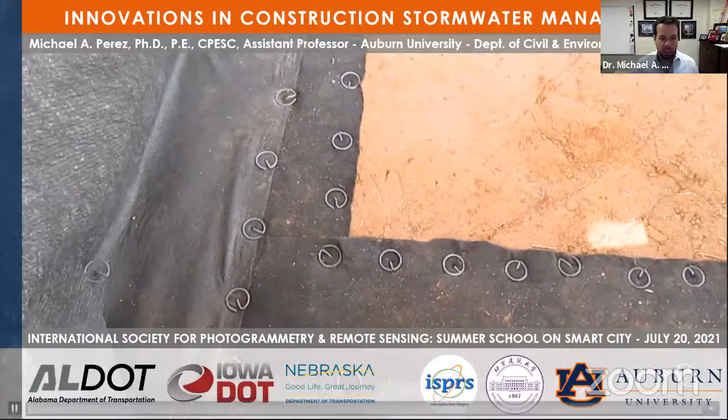So I wanted to start by introducing myself and giving you a little bit of background. My name is Mike Perez. I'm currently an assistant professor at Auburn University. But prior to joining Auburn, I had a little bit of a different route. I got my bachelor's degree in civil engineering from Florida State University in 2012. Then I came to Auburn and got my master's and PhD. I worked for a short period of time in Atlanta, Georgia, for a company called AECOM, where I did stormwater engineering work. Then I became an assistant professor with Iowa State University in 2017. In 2019, I had the opportunity to come back to Auburn, this time as an assistant professor.

To kind of give you a little bit of idea of where we are, I'm originally from Miami, Florida, down here in the southern part of Florida. Tallahassee is here, where I did my bachelor's. Auburn is here, and then Atlanta. Then I went to Iowa State, and now I'm back at Auburn.

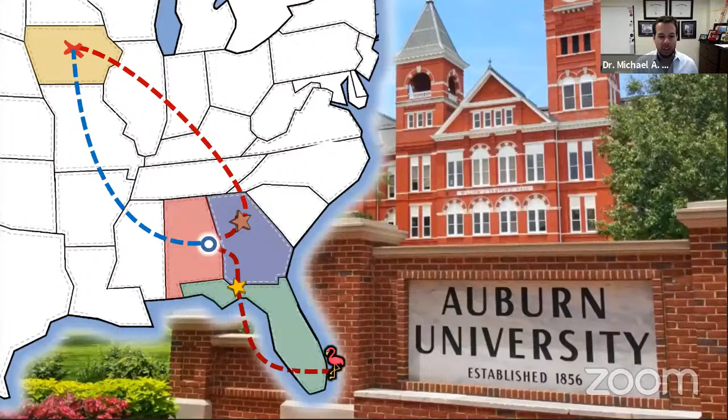While I was at Auburn as a graduate student, I had the opportunity to visit China and to visit the Beijing University of Civil Engineering and Architecture and teach while I was there. So I spent a summer in Beijing, and I got to work with a lot of great people and a lot of great students as part of the Auburn and BUCEA exchange program that we had at that time.

So today I'm going to be talking about construction stormwater management. Here in the United States, construction stormwater—that's the water that comes off of construction sites during rainfall events—is one of the largest non-point sources of sediment. This causes a lot of problems. If you see the picture there on the left, you can see that water is very dirty. It has a lot of sediment, a lot of dirt mixed in with that runoff.

That causes issues downstream when that water gets into a receiving water body—it could be a stream, a river, or a lake that gets polluted. So there's a need to improve the performance of practices that are used on construction sites to help minimize the amount of soil loss that's leaving the site.

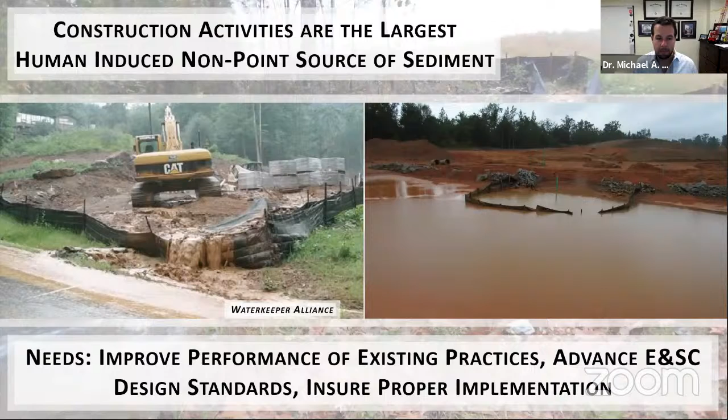Here in the United States, every year we have a report card on America's infrastructure, and stormwater received a letter grade of a D. That's a very bad sign, a very bad grade to receive. What it tells us is that there's a need to improve the way we manage stormwater in the United States.

To give you an idea of how big the problem is, it's estimated that every year there's 80 million tons of construction-generated sediment that's being washed into waters of the US. 80 million tons is a huge number—it's enough to fill up 5 million dump trucks. These dump trucks, if you parked them back to back, bumper to bumper, would create a 9-lane road from Los Angeles to New York. So a lot of sediment is leaving our construction sites and washing into the rivers.

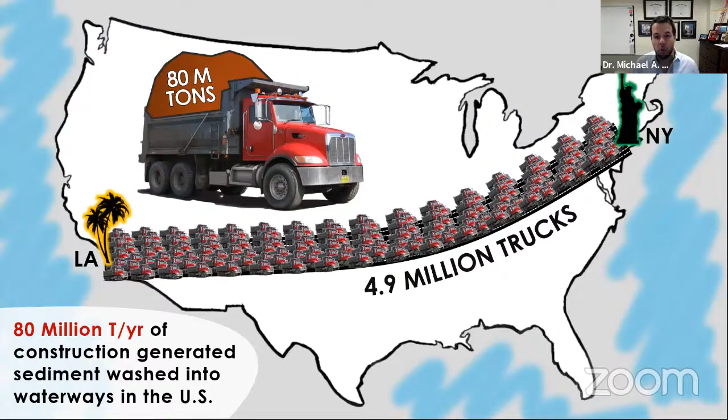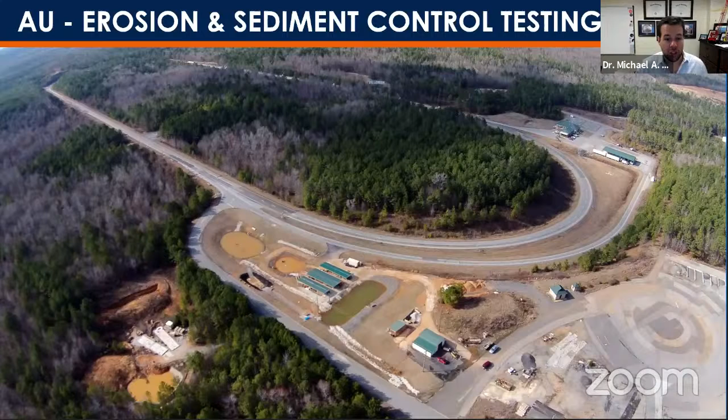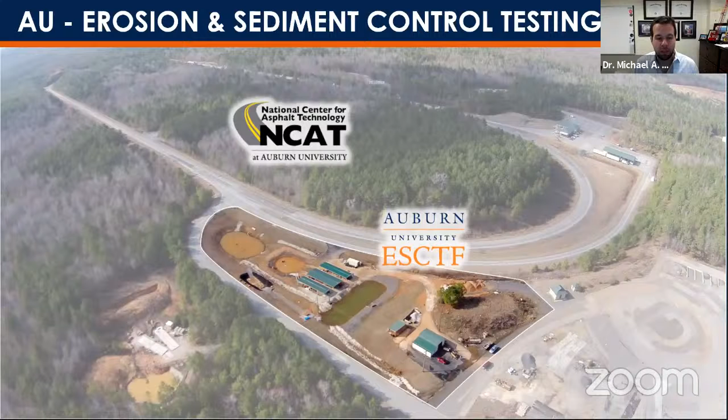What we do here at Auburn is that we've got an outdoor testing facility that's dedicated to improving the practices that are used on construction sites. We're co-located at the National Center for Asphalt Technology—this is a 1.5 mile test track that's used to test pavements. We have our facility down here at the southeast corner of the NCAT facility, and we're called the Erosion and Sediment Control Testing Facility.

This video here just shows you a little bit about the track, and you can see our facility there in the back corner.

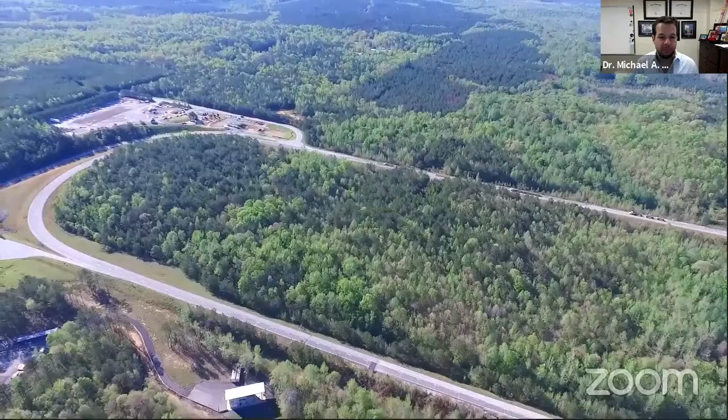The test track is actually used to test different pavements. They pave the track with pavements from all over the country, then run super weighted tractor trailers around it to test the durability of the pavement. They map out cracking and all the failures that might occur on the track.

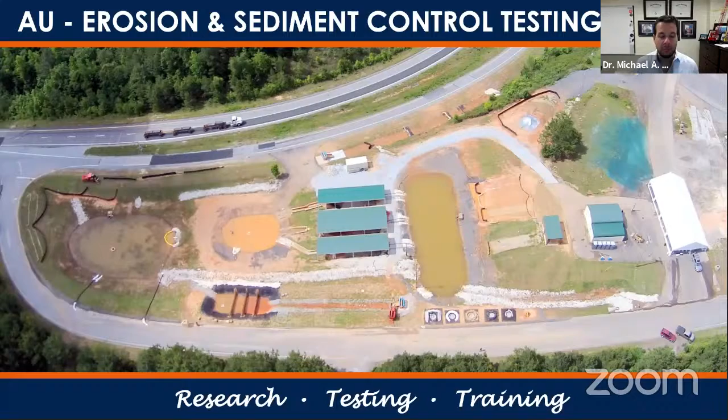Our test facility is about 2 acres in size. This was our current facility before we made some additional improvements and additions. We've got a variety of test apparatuses. We can test sediment barriers, skimmers used in stormwater detention ponds, a sediment basin for research, 3 channels to test practices used on roadside channels, and a rainfall simulator.

On top of all these research apparatuses, we also do a lot of training. We've got a variety of training stations throughout the facility where we can demonstrate the proper installation and placement of many of these practices used on construction sites.

Last year we actually expanded our facility. If you look at the top of the picture, you can see our old facility, and we now have all this new area we just started developing. We've added about 8 acres, so now we're about 10 acres in size. This gives us a lot more capabilities, more water we can use for testing, and more space to conduct experiments.

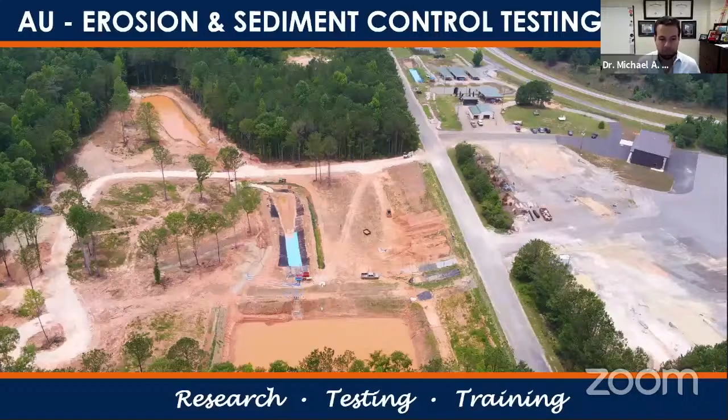When we do testing, we try to mimic or replicate the conditions you'd see on a construction site, but in a controlled environment. We pump water in from our storage ponds at a controlled rate to mimic construction site runoff, and we introduce sediment into the water stream so that we get a sediment-laden, turbid discharge into our test apparatuses.

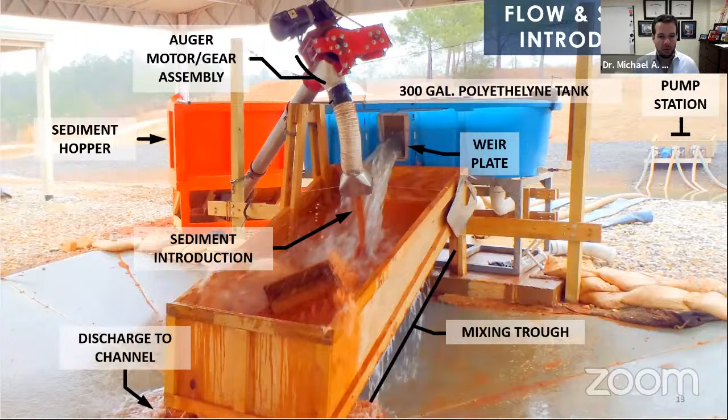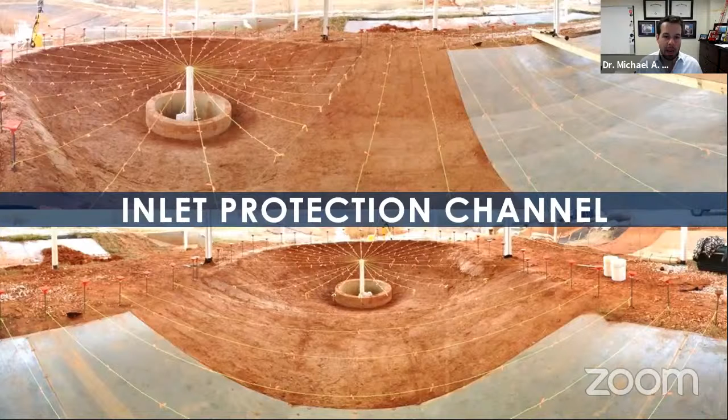In the back, you can see what's called a total station - a robotic total station, that yellow piece over there. We've got all these lines with flags on them, and those flags are survey points. Before an experiment, we survey the entire channel, then introduce the flow and sediment, trying to measure the erosion and the sediment captured around a practice. After the test we survey again, then subtract those two surfaces using GIS to determine how much sediment we captured, or how well that practice performed.

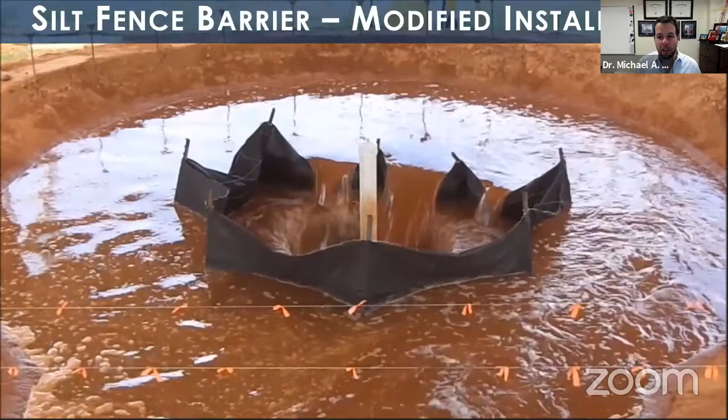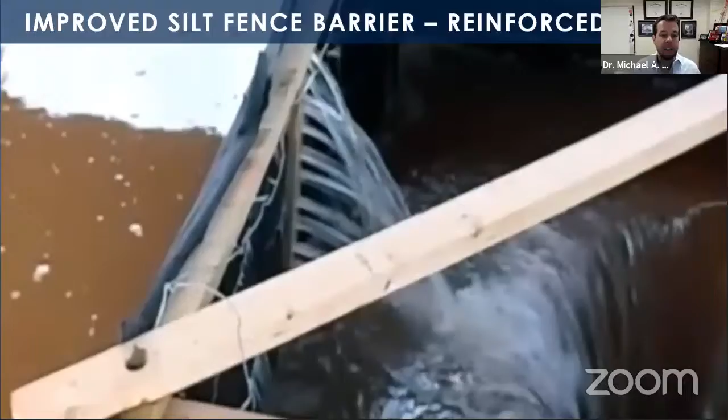So this is the same type of material, that silt fence material, but we put in what is called 2x4s. This is lumber that's commonly available and can be used to strengthen the installation so that it's no longer overwhelmed by the pressures of the impounded water. We also had to develop a dewatering mechanism so that water could exit through the barrier efficiently, since the barrier becomes clogged and water can no longer pass through it. So we add that dewatering mechanism in the back.

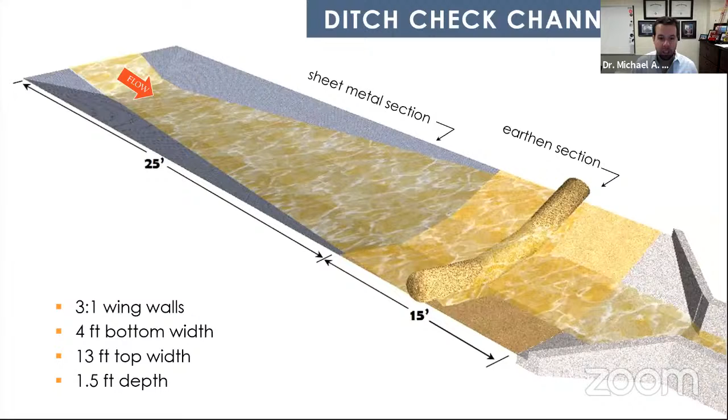Another project we worked on at our test facility was looking at ditch check apparatus, or ditch check practices. Ditch checks are used in a roadside channel to slow water down, reduce erosion on the channel, and let sediment fall out because you've slowed down the velocity of the water. This gives you an idea of our setup: we've got a 25-foot long metal section, then a 15-foot long, or about 5-meter long, earthen section where we can install various ditch checks.

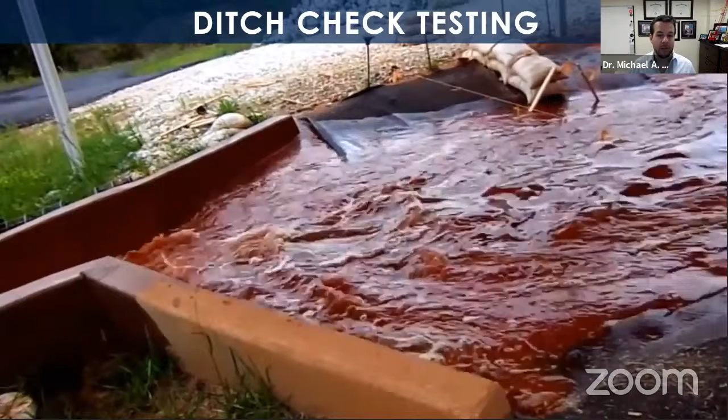Here's a video of a practice that failed, that didn't do very well. You can see the wooden stakes that hold the wattle in place broke because there was too much water upstream. So what we do is play around with the installation and look at different materials to try to make that practice work better.

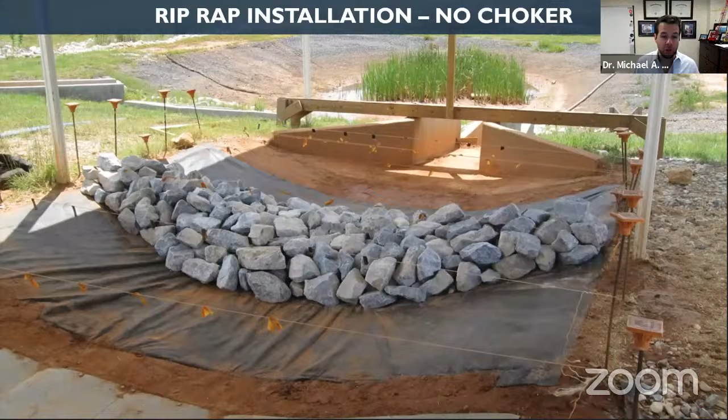Here's another type of practice. This one uses what's called riprap, or stone, to create a ditch check. That rock is oriented to create basically a dam. When we run water through it, this is 1.7 cubic feet per second, you can see it impounds about 14.5 feet. This impoundment is very desirable because this is what slows down the water and protects that channel from eroding any further.

So what we try to do is improve the impoundment capabilities of these ditch checks by modifying the installation. As an example, here we added what's called a choker stone, smaller rock in front of the ditch check, to try to make the practice less porous, to choke the larger rock and prevent water from flowing through it so fast. With that rock added at the same flow rate, we get 20.5 feet of impoundment instead of 14.5, so we're able to extend that impoundment pool further back and protect more of the channel.

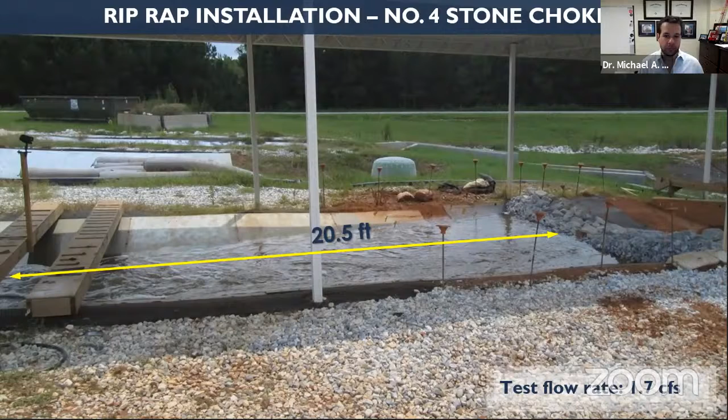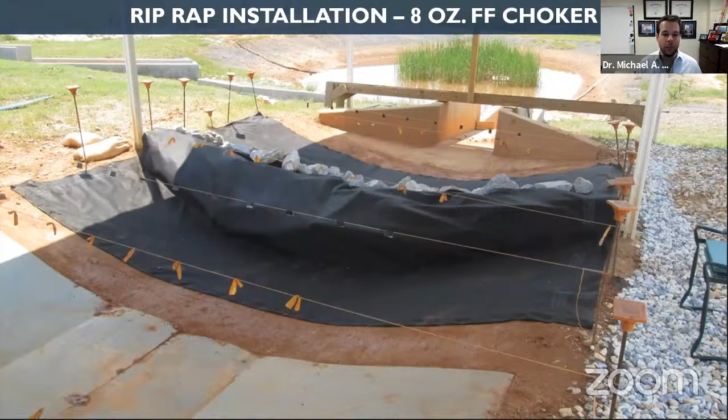We also tried a different installation where, instead of the small rock, we used this filter fabric, a geotextile wrapped around the rock. The idea with a geotextile is that water can no longer pass through the fabric, so now it has to pass through the top of the ditch check. When we do this, we get an impoundment of about 29 feet. So we're able to take our original impoundment of 14.5 and double it by adding that geotextile. Again, this is very desirable because you're protecting a longer piece of that channel.

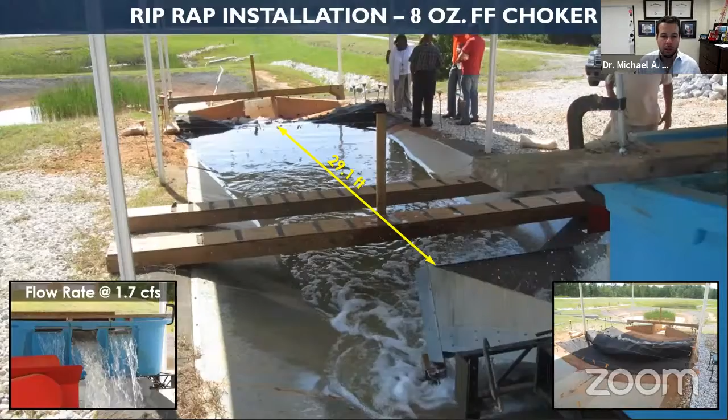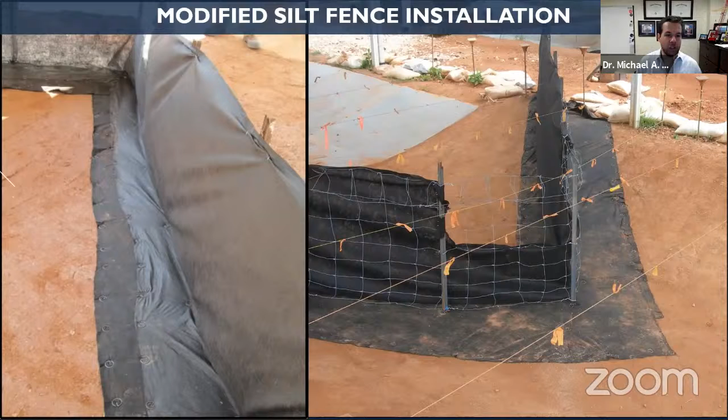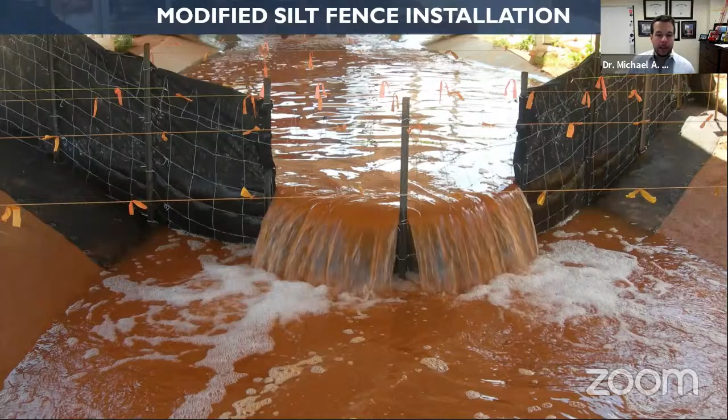We also looked at different materials that can be used for ditch checks. This is what's called a silt fence, installed in this V pattern that you see here. Typically this installation gets trenched into the ground, but we tried a method where you would pin it, or staple it, to the ground instead of trenching it, making it easier and less work to install. We also added a weir notched into the ditch check, which tells the water where to overtop it. So you can use less material, you have a dedicated spillway, and water doesn't go around the edges of the ditch check, which is undesirable.

This was in a longevity test. You can see all the sediment that gets captured in that channel. We also surveyed this channel, and after this test there was 42 cubic feet of sediment.

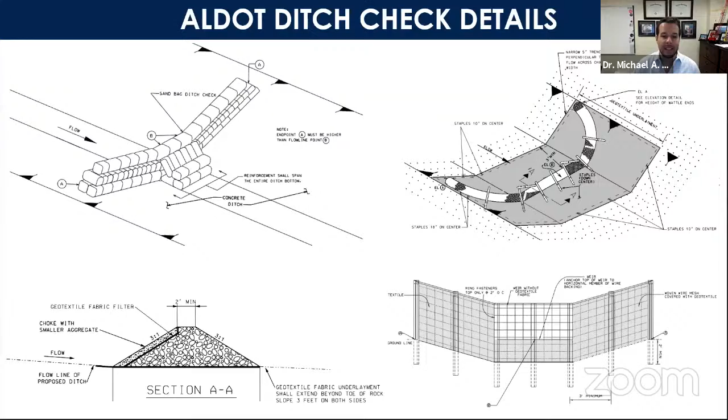This is the ditch check practice with the weir cut in, using a pinning mechanism instead of trenching. This one's installed out in the field, so you can see how big they are - the silt fence ditch check with the weir cut out in the center. You can see how many of these are used along the channel; they use a lot of these on the roadway side when they're doing construction.

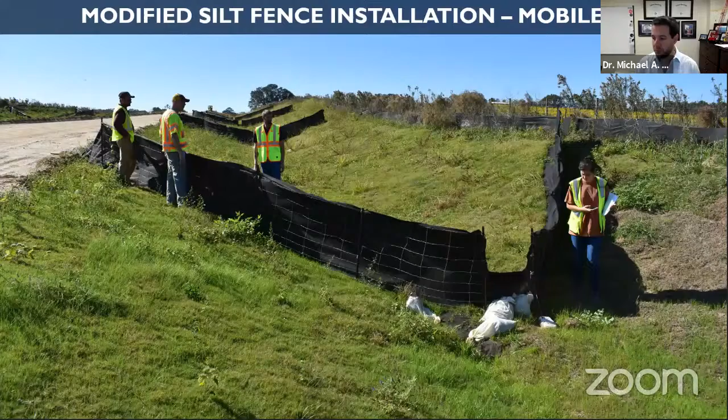Another really neat research apparatus at our facility is what we call the sediment barrier test apparatus. This apparatus is used to test different types of sediment barriers - practices used around the perimeter of a job site to try to keep sediment from washing or leaving the site.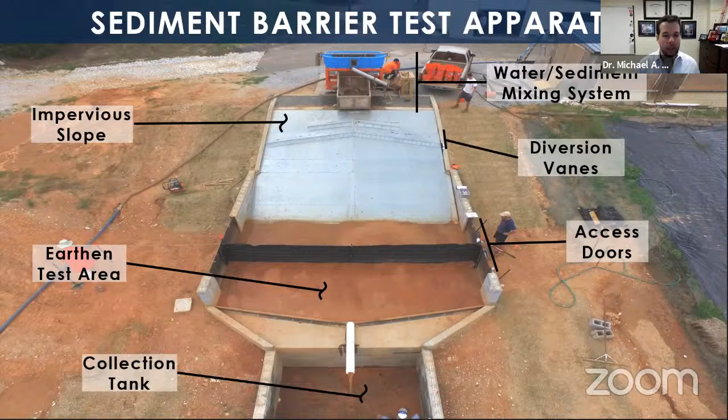We can take water quality samples upstream and downstream of the practice, and we also do surveying before and after a test. We collect all of our storm water down at the bottom in that tank, and we can take measurements there too, including flow rate measurements as it enters the collection tank, so we know how fast or how much water is passing through the system.

When we develop flow conditions for our test apparatuses, we're trying to mimic real world flow rates and sediment introduction rates. We mimic a design storm - in this case, a 2-year, 24-hour rainfall event, a storm expected to happen once every 2 years, lasting 24 hours total. We model that storm through what's called a hydrograph, so we can determine the amount of water to pump into our test apparatuses to mimic a similar storm event.

Similarly, we also model the soil loss expected on a construction site using what's called the modified universal soil loss equation. It's a function of the amount of runoff volume, the peak flow of the storm, and the soil type, known as the erodibility factor. It's also a function of the topography of the construction site, the slope factor, as well as the cover management factor and the erosion practice factor.

For this test apparatus, we were introducing about 38 pounds of soil every minute, and our test lasts 30 minutes. So you can do the math and see we're putting in a lot of soil during that experiment.

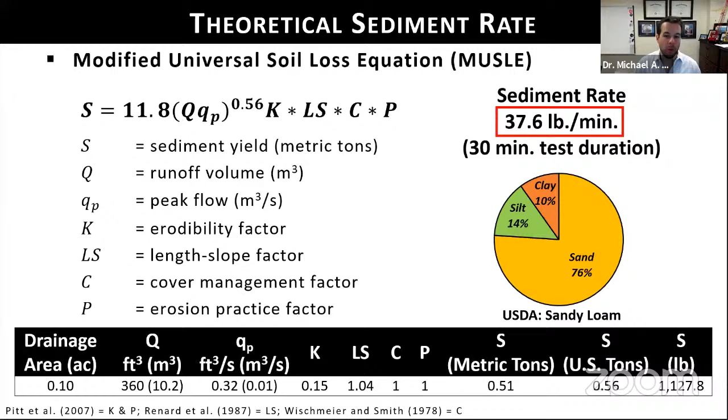Our soil type is what's called a sandy loam, about 75% sand, with the rest being silt and clay. The sand settles out very fast because sand particles are larger, but the clay and silt are very difficult to remove - those are the ones we really focus on trying to treat.

This is an example of a standard installation, or what used to be the standard installation, for a silt fence. You can see the close-up image on the bottom right - that's what the silt fence looks like, and that's what the material, the geotextile, looks like.

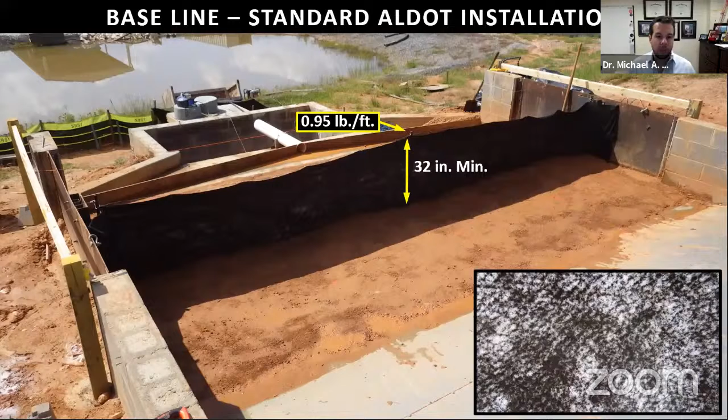It gets installed at a height of 32 inches, with posts supporting the fence upright. Those posts weigh 0.95 pounds per linear foot and are spaced every 10 feet. The silt fence is trenched into the ground in a 6-inch by 6-inch trench, with fasteners every 2 feet along the top attaching the fence to a wire backing.

So there's a wire mesh in the back that supports the entire installation. This video shows the third test into a longevity test. These are 3 back-to-back experiments that we run on the same installation.

As you can see during the third experiment here, the water impound is very high. You can see the T-posts are deflecting. And eventually what happens here is that it breaks the wire in the back, and you have this massive release

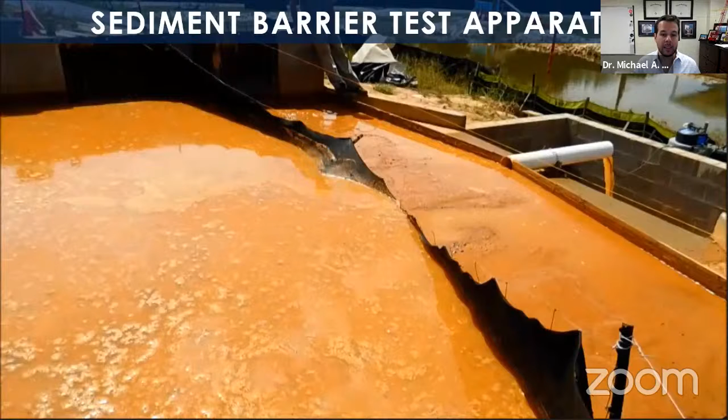of stormwater over top of the fence. This is very notable because you can imagine all this water leaving. You can see the color of the water, it's very polluted. This is going to have an impact downstream, and if there's other practices downstream, this is likely going to overtop those as well.

In our research, we wanted to see how we could improve this installation. We looked at a variety of things. Number one, we wanted to increase the weight of the post. So we went from 0.95 pounds per linear foot up to a more robust post at 1.25 pounds per foot. It has more metal, more weight per linear foot, and also a larger cross-sectional area, so it's a stronger post.

We also tested reducing the T-post spacing. I mentioned that the spacing was 10 feet. We wanted to see what would happen if we went down to a 5-foot spacing, basically adding an additional post in between all the existing posts.

We also noticed that we probably didn't need to impound 32 inches of water. So we went down to a shorter silt fence height, taking it down to 24 inches.

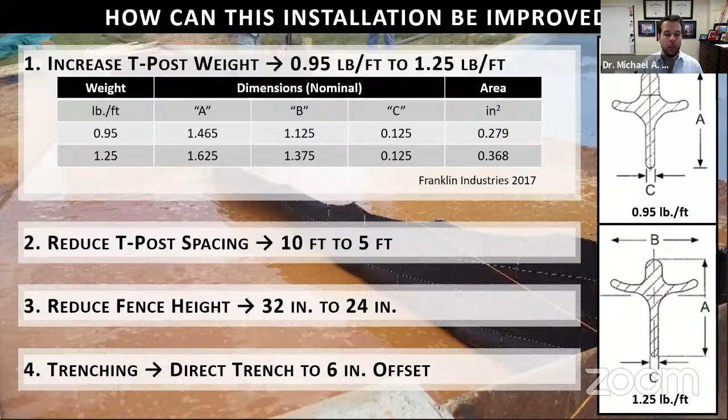We also wanted to test what's called an offset trench. So instead of trenching right at the bottom of the installation, we moved the trench off the base of the silt fence by 6 inches. This is what that offset trench looks like, where instead of having your post inside of the trench, you move your post back 6 inches.

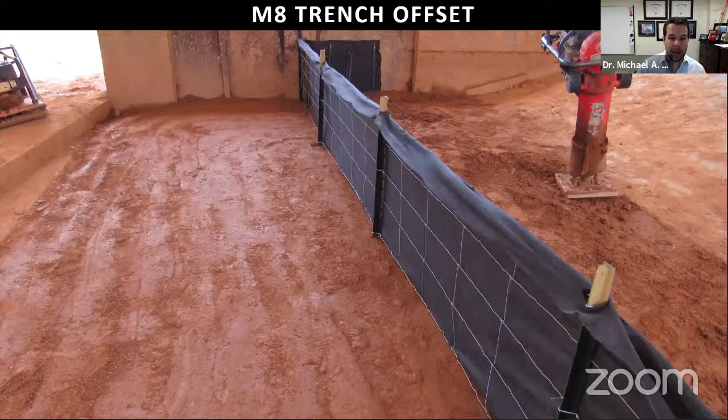So you have that trench you dig, your silt fence goes into that trench, and then you backfill it with soil and compact it. This is after compaction, on the back side, but now your posts are sitting in native soil that has not been disturbed. So they have a lower chance of failing because they have more contact in that compacted soil.

This test is the same one I showed you in the beginning, except now this is with the improved design: additional posts, a shorter silt fence, and that offset trench. Comparing this test to that first video I showed you, the silt fence is a lot stronger. It's able to impound the entire height of that runoff, and the T-posts are no longer deflecting.

Overall, this is working a lot better. It's slowing down the release of that water, and you're able to capture more soil upstream.

I mentioned we capture water quality samples throughout the test apparatus. Here is a cross section of our test apparatus. All these arrows are pointing to a location where we took a water sample. We're interested in capturing water upstream of the slope.

We're looking at the bottom of the impoundment, on the top of the impoundment. We're looking downstream of the silt fence. We're also looking in the catch basin. So in total, we're capturing samples at 5 different locations, and throughout the experiment.

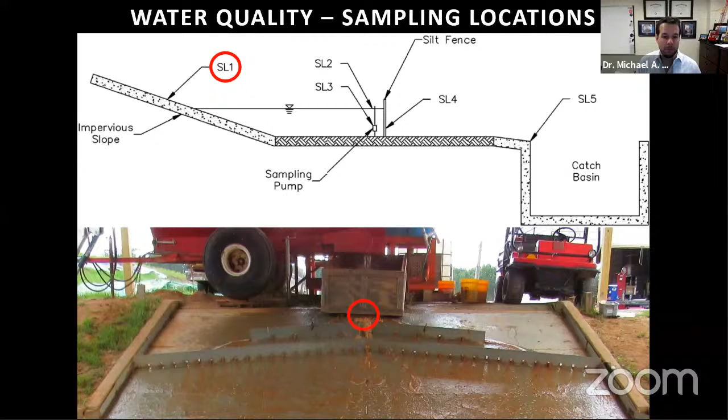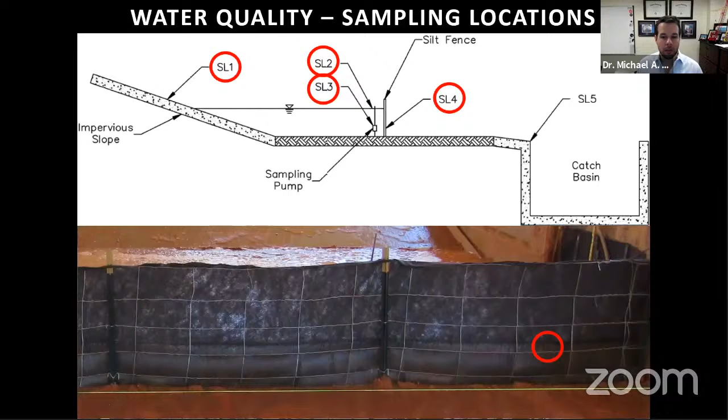About every 3 minutes, we're capturing samples. You see all the different sample spots here. We use a pump when we're sampling from the bottom of the silt fence. This is the downstream, and this is the catch basin sample point.

So SL2, if you remember, is the top of the water column, the top of the impoundment.

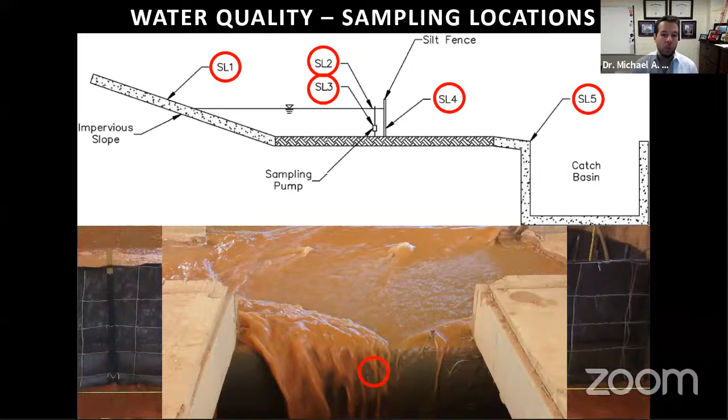One of the other improvements we made to this installation is that we added what's called a dewatering weir. This weir is made out of plywood, and it gets installed in a break of the silt fence. That allows water to flow through the top at a dedicated point, so that if a big storm comes in and overwhelms the fence, it has a dedicated point to overtop without causing total failure.

You can see we add this rock downstream so that it protects the area downstream from scour and erosion. You also have these dewatering holes so that it allows water to flow through and slowly dewater the fence, so that you don't have water sitting in front of the fence for a prolonged period of time.

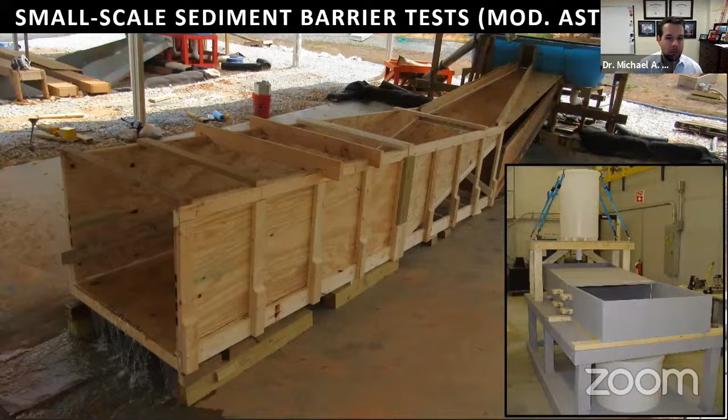This is a small scale sediment barrier test apparatus that we have at the facility. This apparatus allows us to test just the geotextile portion of the silt fence. We've looked at a variety of different materials. There's a lot of materials available for silt fence. They've got two major classes: what's called non-woven silt fence, and also the woven type. These fabrics all have a different flow rate that they're rated for.

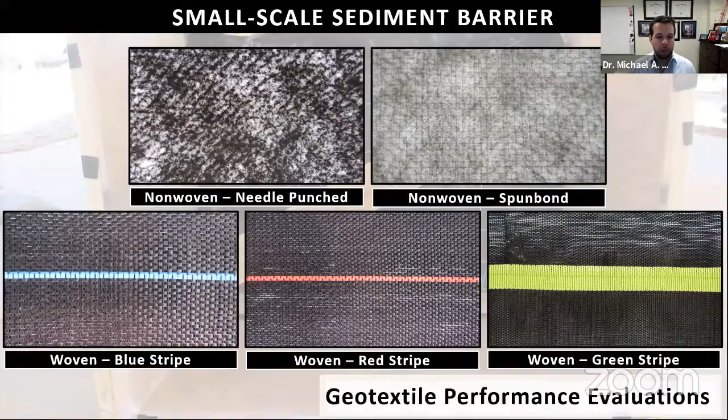For example, this needle punch non-woven, the manufacturers say 150 gallons per minute for every square foot, and we were only seeing 1.5. So a very big difference between what's published and what actually occurs in the field. That's because when they test those products, they test them with clean water, not sediment-laden water. But we know on construction sites we can expect sediment-laden water, not clean water.

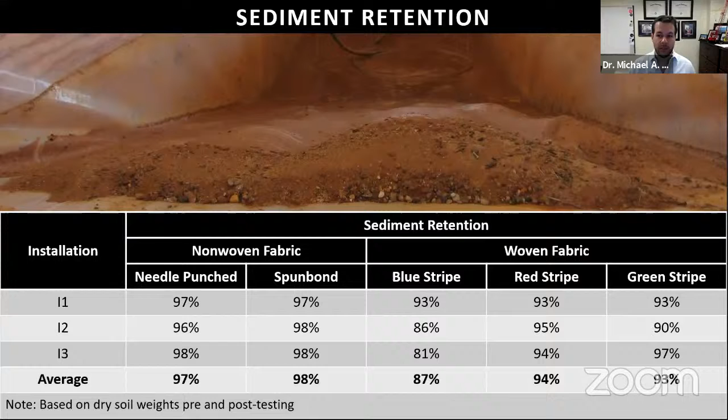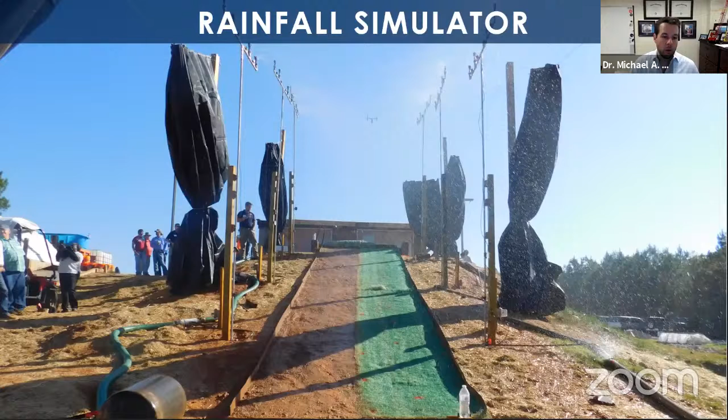We can mimic a storm event by applying rainfall. This is a 2-inch per hour rainfall intensity. You can see how much rain that produces. But then we also go up to a 4-inch per hour, so here's the 4-inch. And then we also have a 6-inch per hour storm event.

In total, these three events we do for 20-minute intervals: 20 minutes of 2-inch, 20 minutes of 4-inch, and 20 minutes of 6-inch, giving you an hour-long storm event. During that hour, it's equivalent to the 500-year storm here in Auburn, so this is a lot of water coming down in a short period of time.

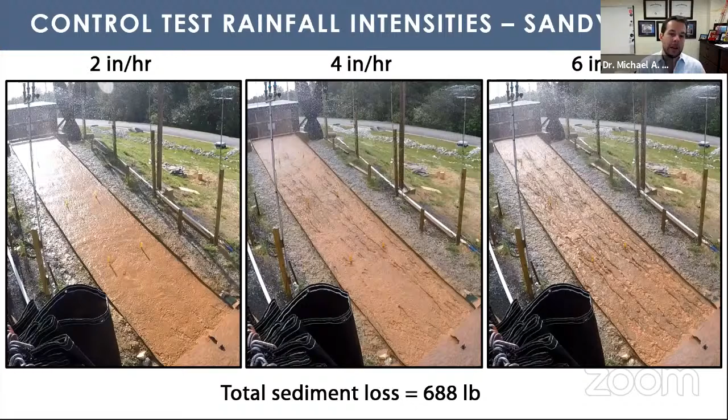With this test apparatus, we're able to measure the amount of sediment loss by not protecting your slope, then come back and protect the slope to see the difference in sediment loss. For this sandy loam type soil, we had about 700 pounds of soil loss in one test sequence, compared to a loam soil where you have 2,200 pounds of soil loss. So very different amounts of erosion. The soil type that we build on also has a lot to do with how much soil loss you have on a site.

Here's another test apparatus. This one is designed to test catch basin inserts. This was done for an Ohio DOT project, where we were evaluating these bags or inserts that go into the storm drain catch basin. The way this system works is we pump water and sediment through this pipe, and it hits this metal section and goes into the catch basin. This is what the inserts look like - it's an insert that gets fitted into the storm drain inlet, made out of a geotextile, and the idea is to act like a filter to try to capture runoff as it goes into the inlet.

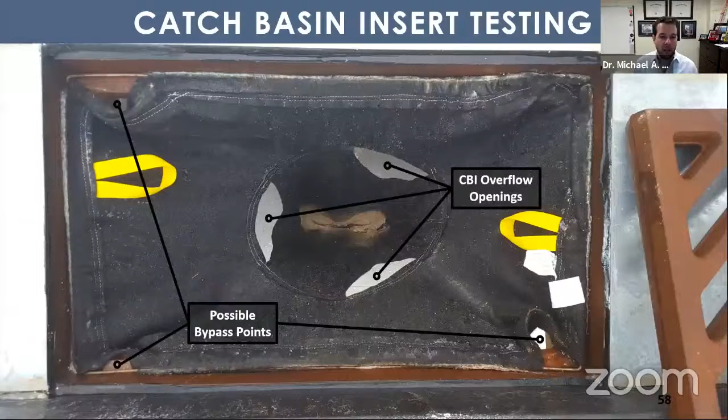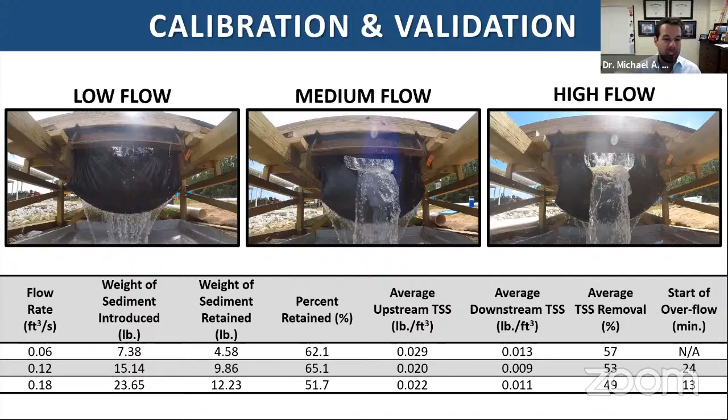Here's some testing we did. We had a low, medium, and high flow rate, ranging from 0.06 cubic feet per second up to 0.18 cubic feet per second. What we learned was that these bags only retain about 50 to 62, 65% of the amount of sediment we introduced, which is not very good. From a total suspended solids standpoint, it only captured between 49 to 57%, and it had a lot of bypass through those openings because they're not able to pass that high of a flow rate. So these did not work as well as manufacturers claimed, and so they're not being adopted very much.

Another thing we get into is product evaluation. We work with different manufacturers to test their products in our test apparatuses and see how well they work, and we can work with research and development on their side to help them improve the product, help them understand the way it works, and help them modify it to perform better.

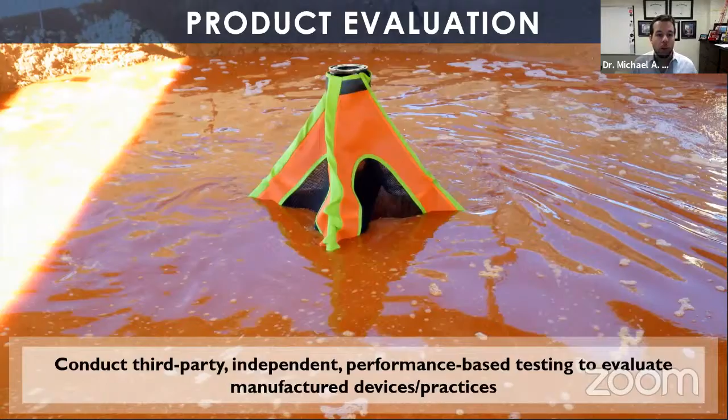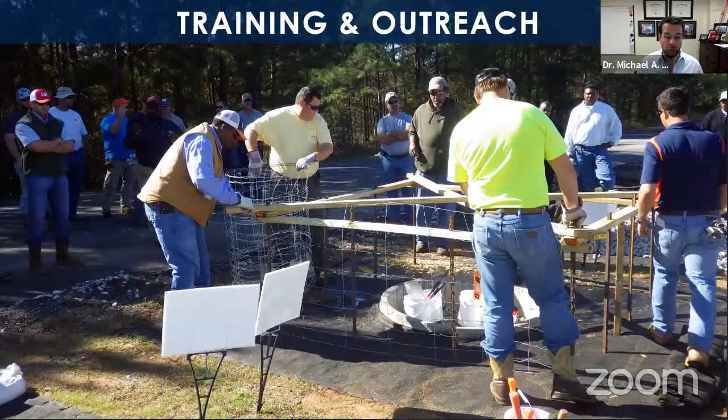We also do a lot of training and outreach at our facilities. We'll do hands-on training where we set up our entire site to do demonstrations, and we teach professionals in the industry how to install these practices and how to properly place, maintain, and inspect them, so that they work to the best of their capabilities out on a construction site. This is one of the more fun aspects of what we do - sharing the research we do with the industry and helping them adopt the practices we've developed.

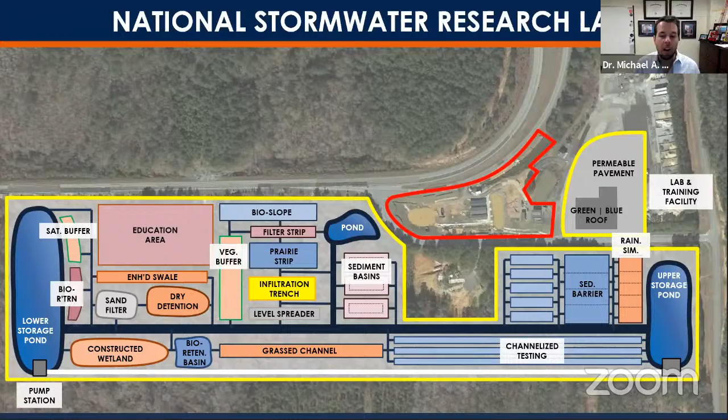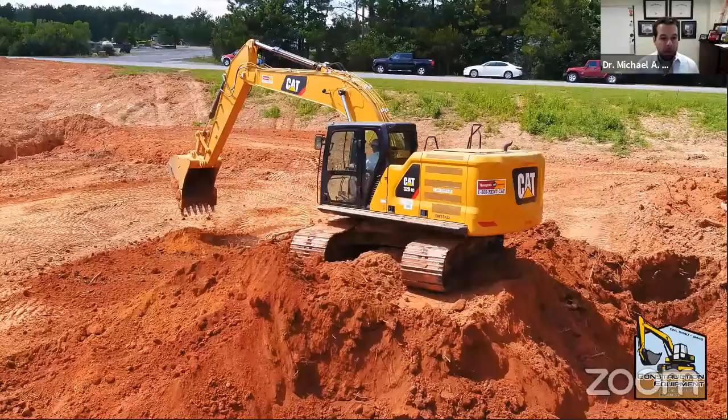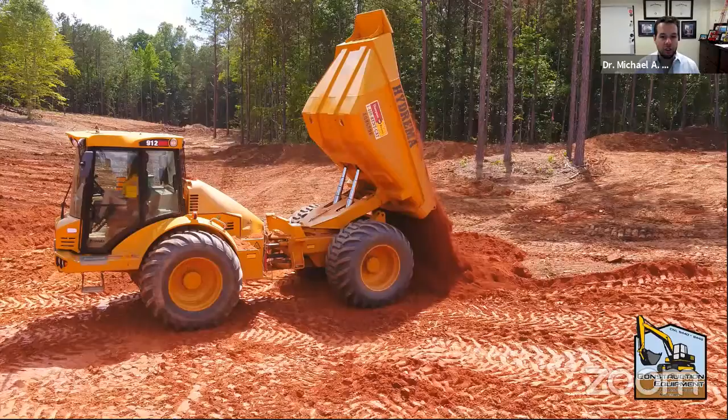I mentioned that our facility is undergoing some expansion. The area in red was our original facility, and the area in yellow is our proposed expansion. We've developed about a third of that yellow area now with our expansion. We did some construction last summer working on this facility and expanding it, adding several ponds to the new area along with new testing locations and new testing apparatuses. This is a lot of fun to be able to do all this construction, do all this work, and expand our capabilities.

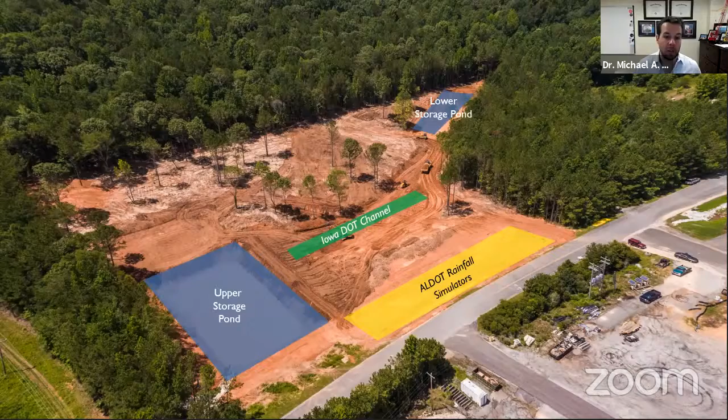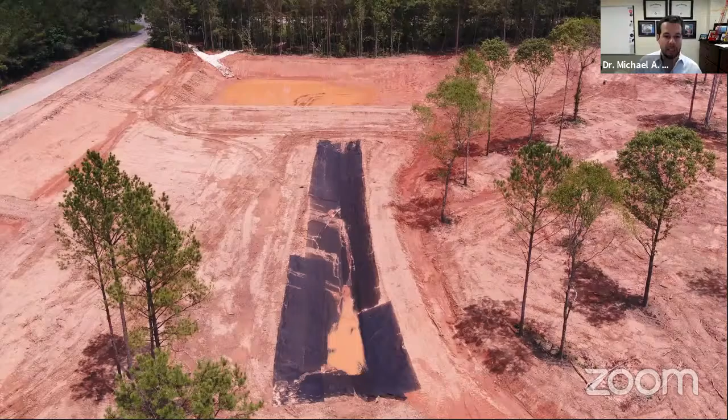We also are doing work for the Iowa DOT, looking at a channel and sediment basin setup. All of these new apparatuses are a lot larger than our original apparatuses. And you can see that was our construction team last summer.

To give you an idea on some of these test apparatuses, this is our Iowa DOT sediment basin. The way this works is that we'll be pumping water in from the storage pond into our test channel, introducing flow and sediment at the mouth of the channel. We'll be testing a variety of practices like rock check dams. We'll have baffles installed in the basin, and we'll also have a skimmer or dewatering mechanism in the back.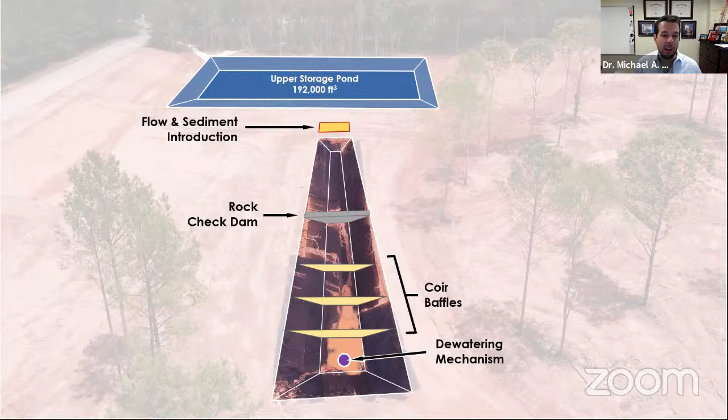This will allow us to make improvements to the current practice or current setup that the ALDOT does. Here's a schematic showing the setup we've created. You can see this channel is 200 feet long, so about 61 meters. It's pretty large in size.

You can see the cross section of the channel, about 43 feet across, 10-foot bottom. The side slopes are 3 to 1, 3.5 to 1. In total, it's about 5 foot deep.

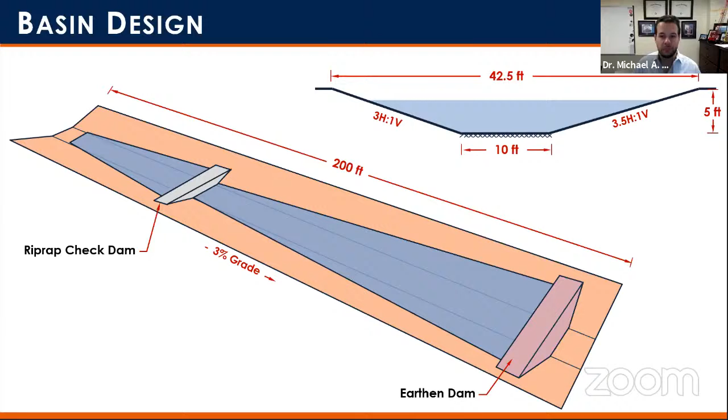We're also looking at new research with our rainfall simulators. We're going to be varying the configurations, different slopes, different soil types, looking at topsoil versus clay, loam, and sand soils. The idea is to develop design-based guidance for better use of different erosion control practices.

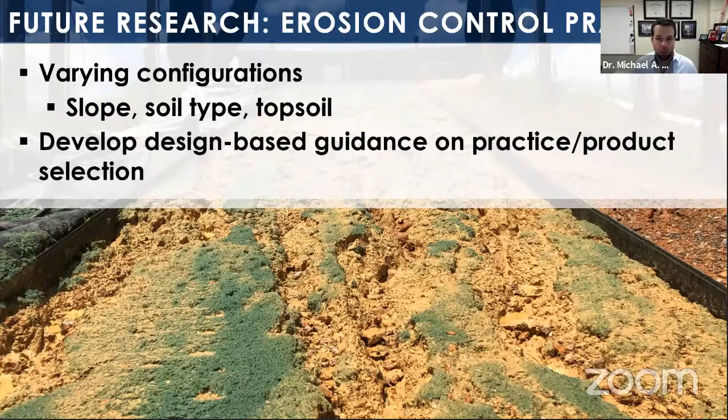We're also working on flocculants. These are chemicals used on construction sites to try to capture soil particles, the smaller soil particles, make them larger, and help them fall out of suspension at a quicker rate. So we're developing guidance for the use of these flocculants on construction sites.

We're also doing some really cool things with UAVs. We've got a project where we're doing deep learning implementation. We're using these on construction sites to identify where stormwater practices are installed and be able to map them out. This is a very cool research project. We're using drones, surveying, and deep learning methods to try and map out and inspect a construction site using a drone.

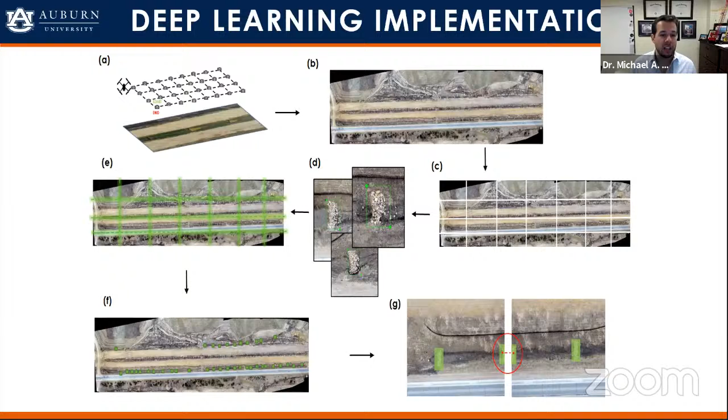So with that, I just wanted to share some of the work that we're doing here, some of the hands-on research we're doing, and I'll open it up for any questions. Feel free to submit questions through the chat, and I'll be happy to entertain those and answer those for you.

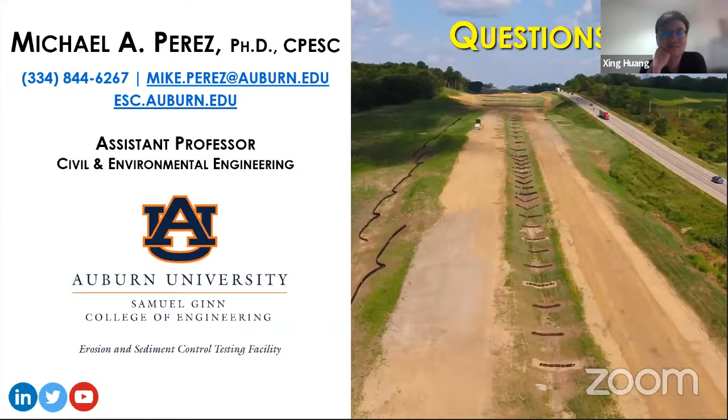Okay, I think Dr. Michael, I think this is really a nice presentation, just like the students said. Thank you again. Yeah, thank you, thank you. Thank you so much for your time and support. You're very welcome.